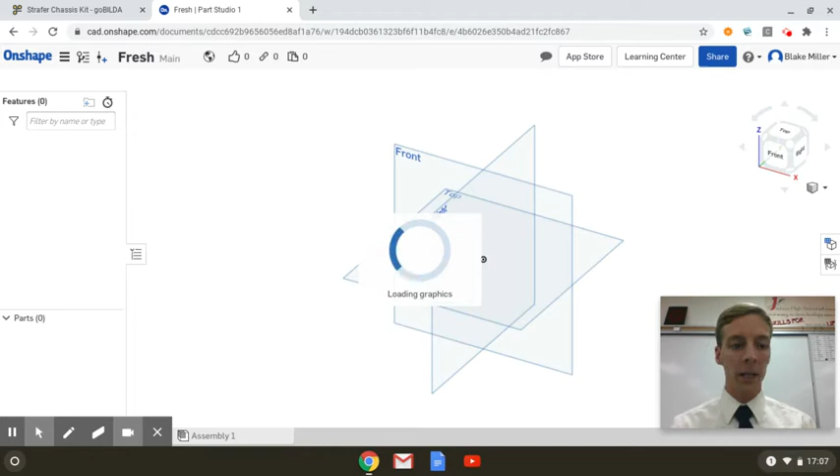Normally, when you start a CAD, whether it's Autodesk Inventor or Fusion or any of these things, your goal is to create a 2D drawing and then extrude it out, make it a 3D shape or make a 3D box and then cut pieces away. Whatever you're more familiar with, that's just the way you design it. It works both ways - you can add pieces to it or subtract pieces from a whole to get down to what you want. You make a sketch, a 2D shape, and then you build it up into a 3D shape.

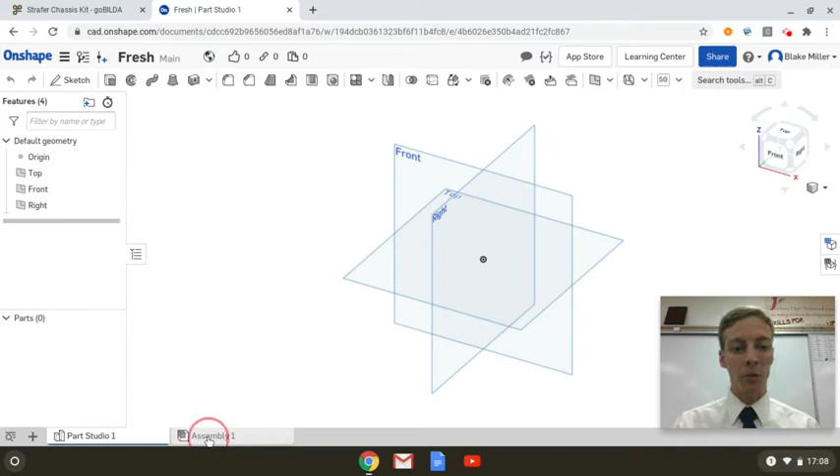That's what we got. We're going to do something a little different right now. I need to hide those tools right there. Okay, so there's a part studio right here. Part studio is where you make the parts individually. Assembly - we're going straight to assembly right here because this is easy.

So what am I going to do? I'm going to insert. Well, I didn't have any parts that I can pull into my assembly. The way OnShape works is you make your drawings, you make a part, you name the part, and then you can have multiple parts in a drawing, or each part gets its own drawing, doesn't matter. But then now you go to an assembly and you make these assemblies, and you can make sub-assemblies and master assemblies and all these other things.

Here we go. We are just going to insert, not from our current document because we don't have anything in the part studio. We don't even have anything in a sub-assembly that we could be using. But we're going to go here to other documents.

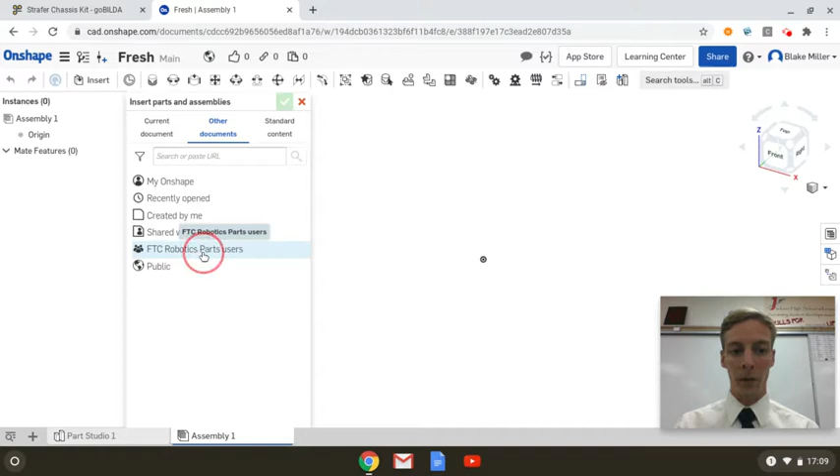Hey, FTC Robotics parts users - when I do the email that we talked about, this is what gives me permission to all these folders. And look right here, it says goBILDA. Ooh, look here - Structure, Structure. We scroll down, we see Channel. Ooh, channel, right here - Configurable.

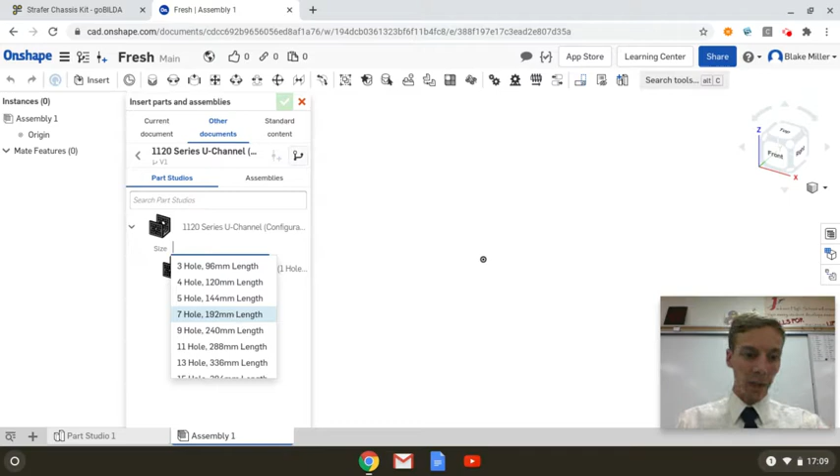I'm pointing with the other hand, you shouldn't see that. All right, here we go. We need two of these that are - since these are the same pattern, they're just longer than the other, it already has all of those built in. We need 17 hole. Boom.

And we're going to insert one of those right there. The wheel says we got to wait. Still waiting. There's one - click. Now it's placed. Let's do another one. Click. Now it's placed. All right, we're done with that kind of channel.

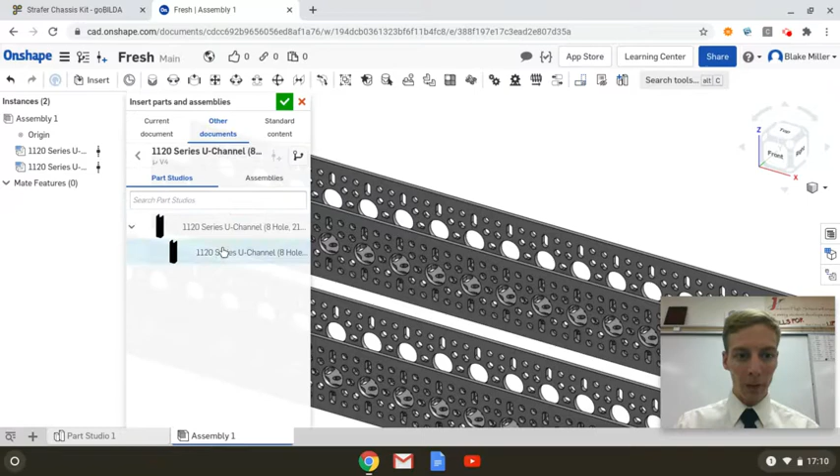Actually, we need one more of these over here. 45 hole - no, we need this 8 hole right here. We need that. And did I click it? Hold on, there we go. One of those, and another one there. You can copy and paste these after you get them in there.

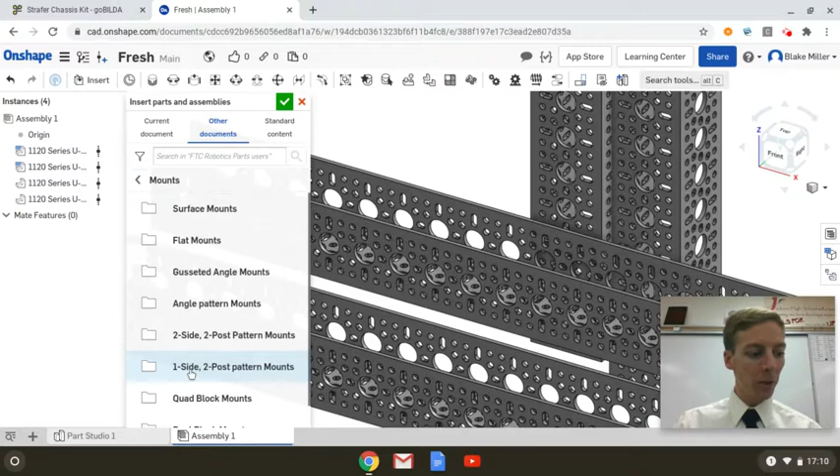That's fine. There's one more part we're going to get. It's not in channel. If I back up and I go to Mounts here, okay, and I go to the Quad Block - the quad block is the difference between the old kit that was on the website and the new kit that's on the website, if you were part of that conversation.

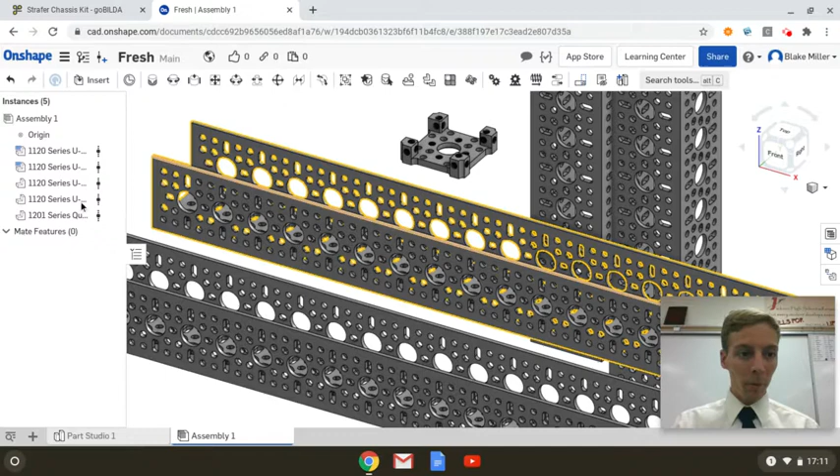That's the quad block, so that's the mount, and I'm going to put that right there. We're going to wait. See if it did anything. Boom. Then we're going to go ahead and close this, say okay, I've got it all - even though I don't - because I'm going to come over here to this quad block, right click it and hit copy.

And then I'm just going to come over here, Control V. That's 2, that's 3, and that's 4 right there. We can zoom out, we can pan around, and we are ready to go.

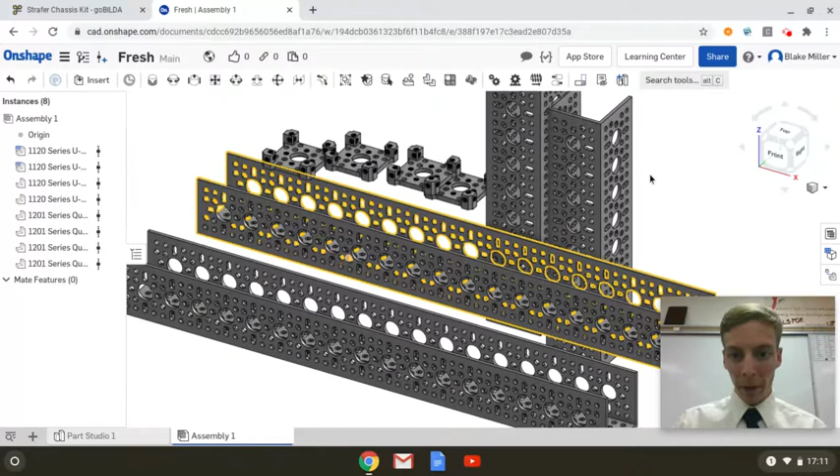I can look at this from the front. I can look at this from the corner here. I like those corner views, they show everything up. Okay, you know what? Let's just build this upside down.

Let's take this piece right here. Here's what we're going to do - we're going to grab it, we're going to lay it flat. I want it to come over 90 degrees. You can tap 90, you can scroll till 90, and then you just click.

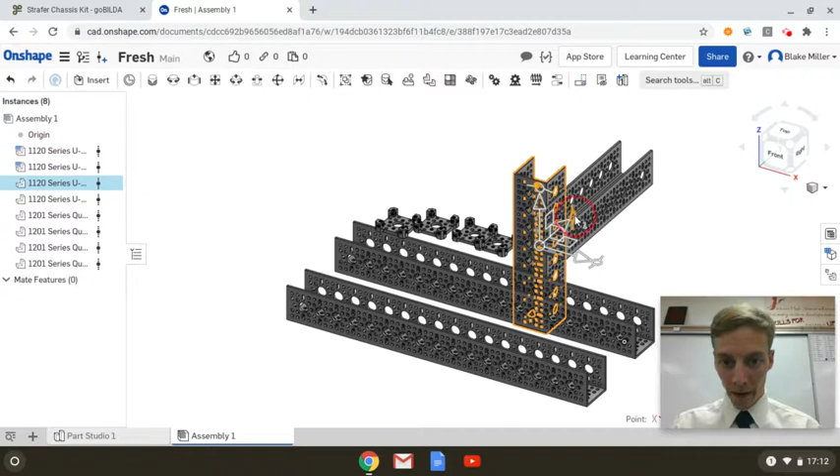Rotate - which one? I'm going to grab that arc right there, we're going to roll it around. Not 95, not 85, I'm going to type 90, hit enter, and then click. And then I'm going to grab this and move it over here a little bit.

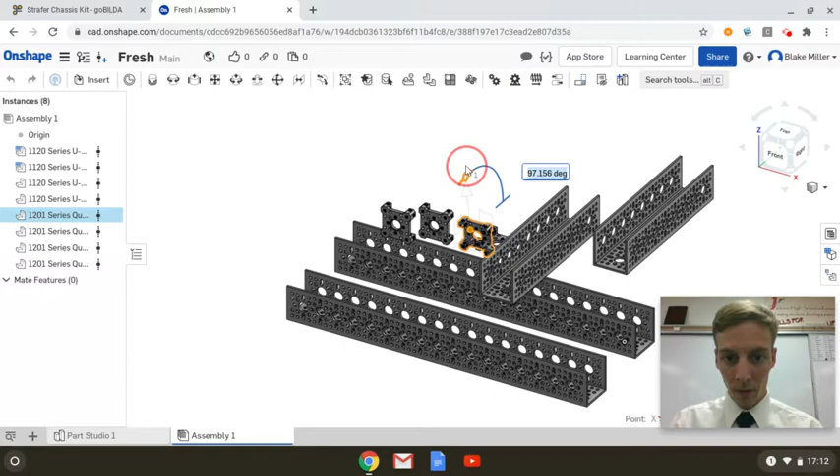Done. I'm going to take these blocks, take two of them and turn them up 90, like so - let me just go ahead and tap 90. Click. This one - type 90, click, enter, sorry. These two, I want to face the other direction. 90, enter, click. Scroll in, click, get away from that.

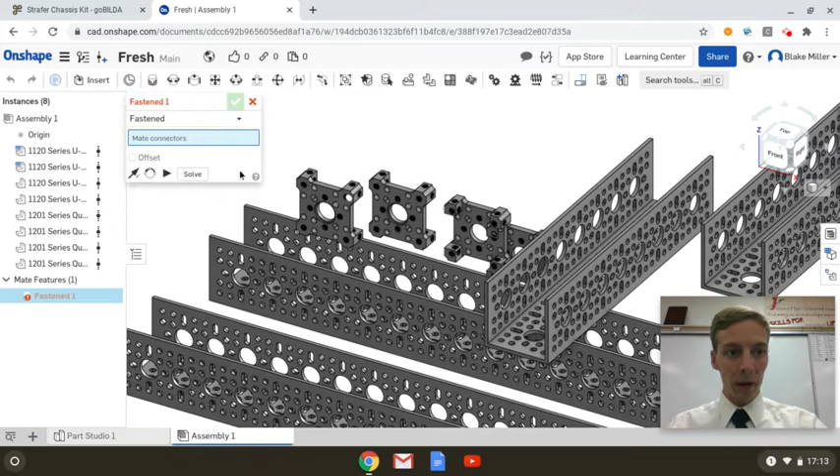All we've got to do is attach these together and mate them. Since I'm in an assembly, not a drawing or part studio, I come up here to this fastened mate. There's fastened, revolving, sliding, pin, ball and socket - all these different types of ways for things to stick together. We're going to start with the fastened one. It's nice and easy. I click fasten mate, it brings up this box, and I need to pick two things to stick together.

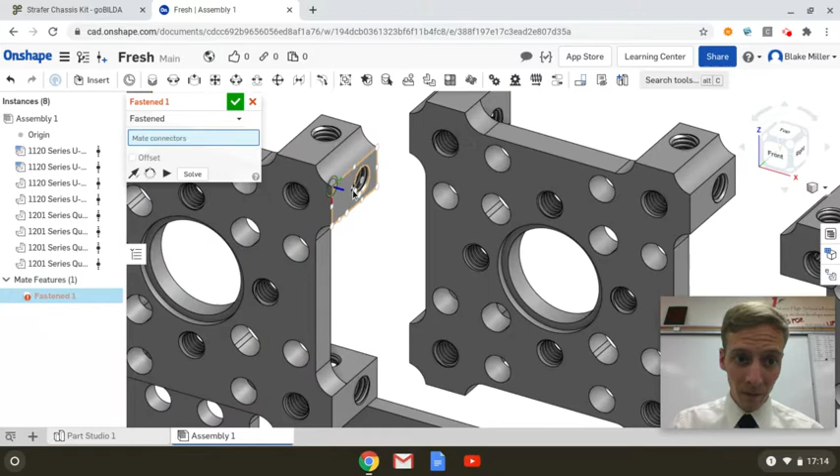So I'm going to zoom in right here on this face. I don't want that face, I want to move this around until I get this. Just got to wait, the computer's being slow right now, probably because we're recording. Nope, that's not the one I want. That's it right there, right in the middle of that hole with the blue outline.

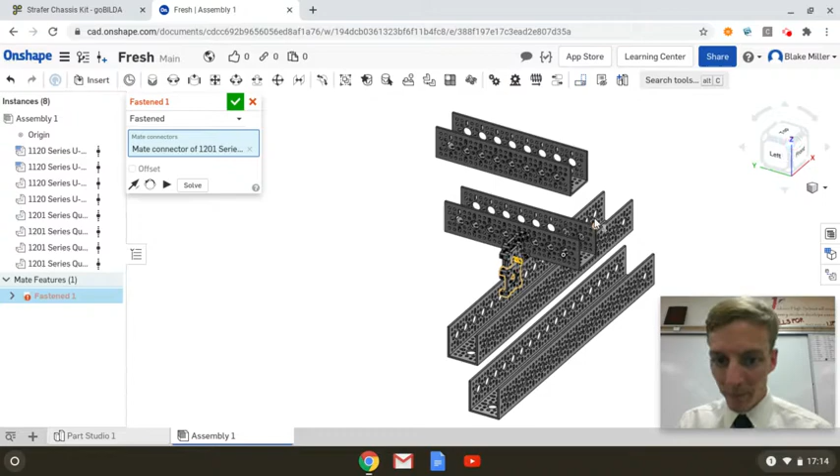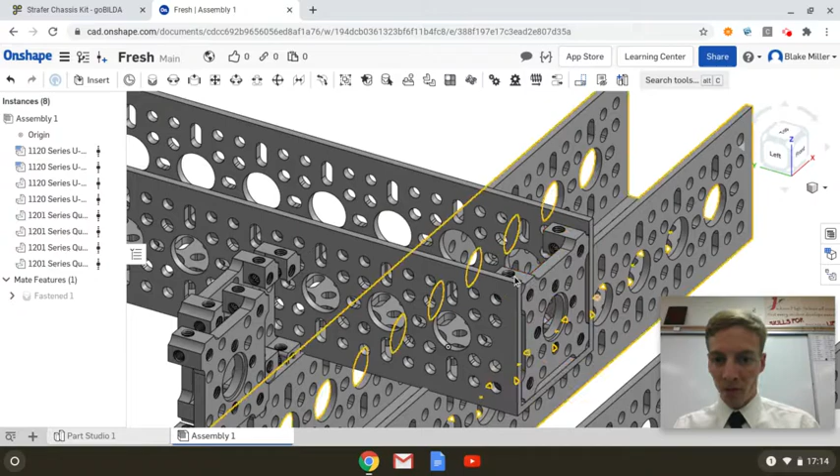We're going to zoom out, scrolling, coming right over here to this guy, scrolling in right here. There it is, click, and it moved it right there. All you got to do is click, yes, I agree. That's where it goes. It does give you this error like, hey, let's go ahead and do it again, and it automatically starts doing it over. Click away, and that's set - it's fastened in there. You can add the screw for detail later, or you can let it be.

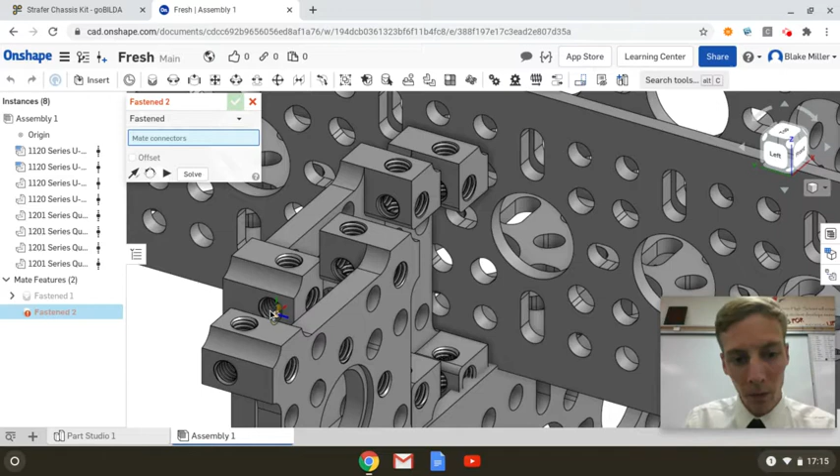All right, so let's take one that's going the other way. We're going to do another fastened mate right here. These guys are kind of all on top of each other in a hot mess. Let's get one right here. I know I'm leaning all over the place. I'm looking - there it was.

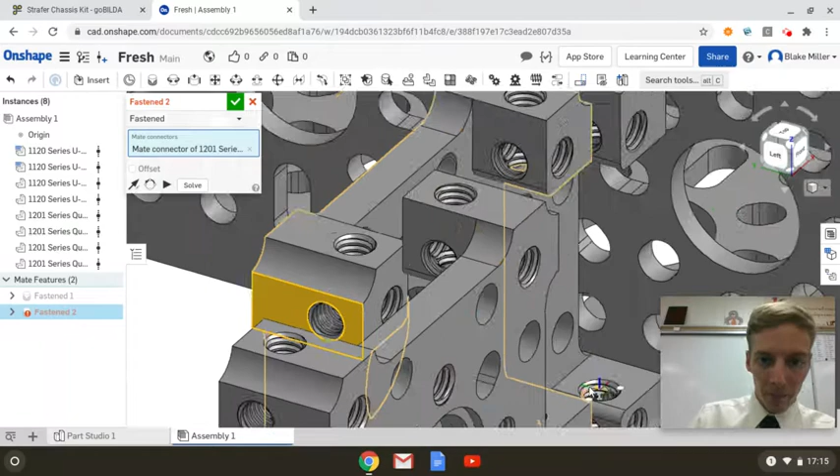So you got to kind of reference the face, and then it shows that hole. There it is, all right. Scroll out, scroll out, all right. So that is that hole right there, but I've got to look at it from the inside. There it is, I tap that, and you can rotate this. That's what this is, I can reverse it, flip the primary axis.

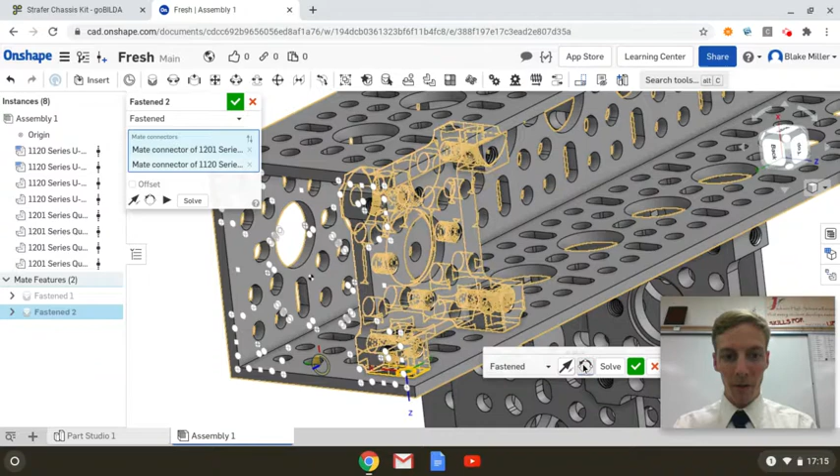Nope, that's not what you want. And you can rotate it, rotate the secondary axes, 2, 3, 4, and it goes all the way around. Once you get that set in, green check, and you're done. Boom, so I now have that crossbar.

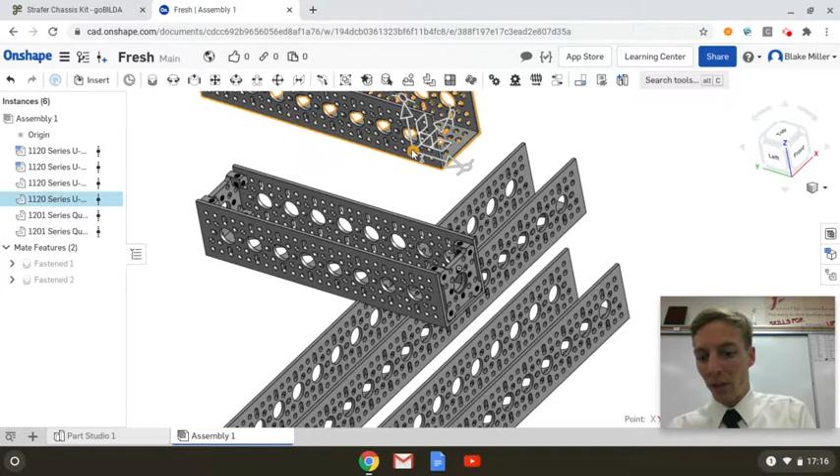And then I would simply put these other two in. In fact, you know what, let's do this - let's delete that, let's delete that. We're even going to go back and delete this because we just got a better way to do this. I could take this and copy it, I can call that a subassembly, and I can copy that in the end. What we're going to do first, though, is we're just going to attach that.

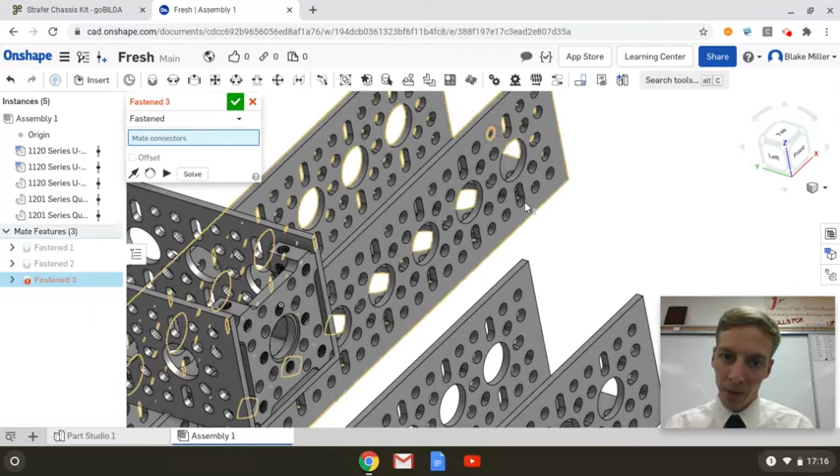So if I look down here, second hole, diagonal, diagonal, and I'm going to do another fastened mate. So I click there, second hole, right there. That's it, that will attach way out here.

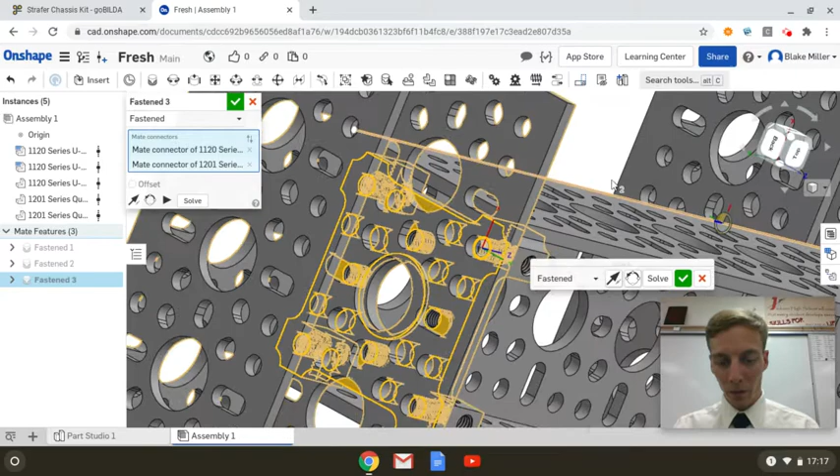Now make sure it's on the face, don't let it sink down in there. Face, right there, I clicked it. 3, 2, 1, let it think about it. Zoom out, zoom out, get back to a normal kind of view here. Make sure it's attached like you like it.

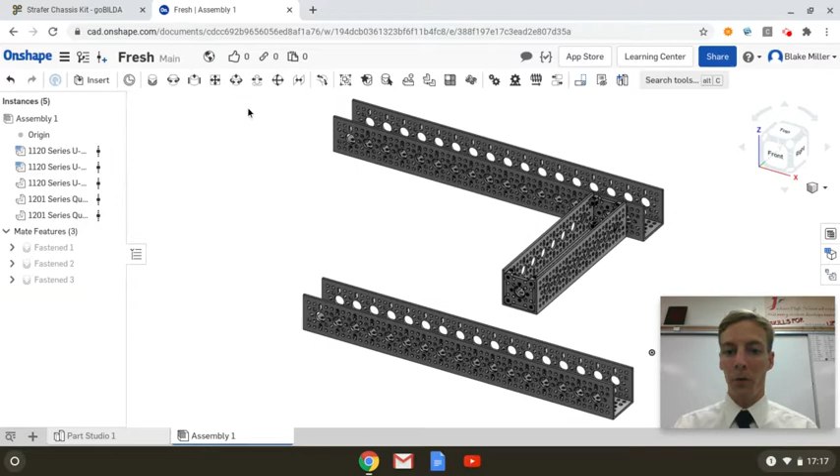Boom, I would copy that, make another crossbar here, then attach this one here, and you're in a good spot. You are already moving on. This is so easy. Now, this is cool - let's go back, let's just go to Onshape. That was super fast, and I already had the whole chassis assembled.

Just for fun, though, if we go into goBILDA, we can look around - they have the kit right here, the chassis kit, the Strafer chassis with wheels. All you got to do is open that up. 3, 2, 1, there it is. 4 tires, 2 crossbars, 4 motors. The wheels are in proper position.

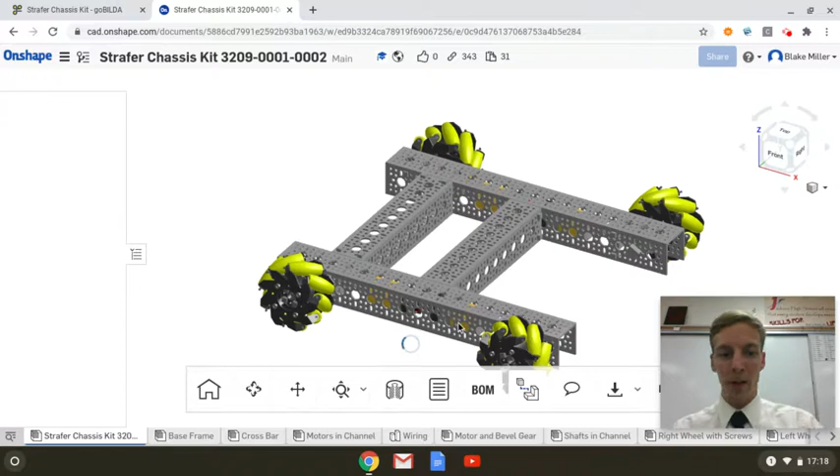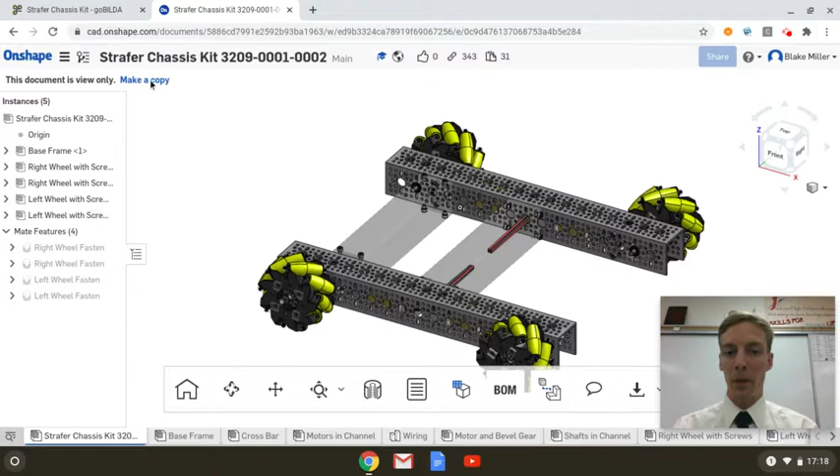It's got spacers, it's got screws, it's got hubs - it's still loading, right? All of it's properly assembled, properly mated, related, spacers, nuts. You could see everything's going on in there, and you just hit make a copy. And it's still loading because the Chromebook is choking down because we're recording.

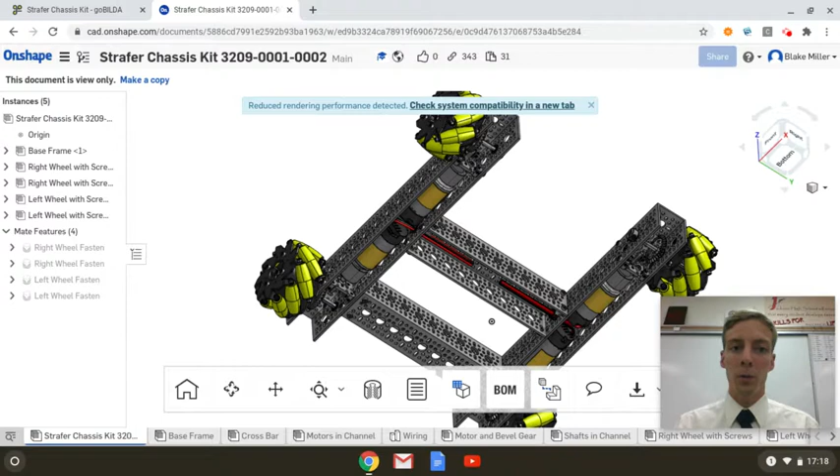All right, but I'm rotating slowly. It's got the wires in there, it's got the grommets, it's ready to go. 10 minutes, up and running. You are building this, and you are impressing judges, and you're learning a skill, okay? And after you stop using just the kit of parts, then you're ready to go - you can build your own from the drawings. But this is good practice, so get going and get something done.